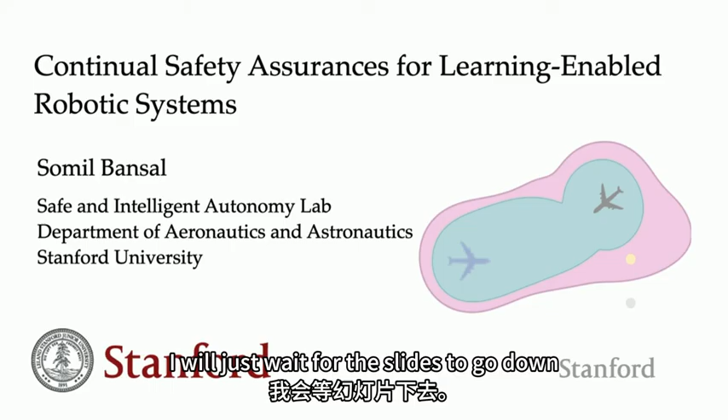Let me start this talk with the long-term goal of our lab, which is to develop robot algorithms that operate with guaranteed safety and performance in new and uncertain environments. We think about this question in the context of a variety of different applications: autonomous drones, autonomous cars, legged robots, aircrafts, and more recently, space exploration.

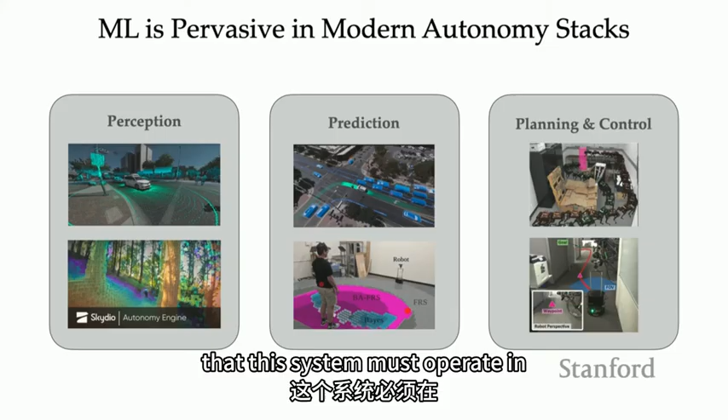If you look at these systems, machine learning and AI are becoming increasingly pervasive in their autonomy stacks, most notably for perception and trajectory forecasting, but also for planning and control. And for a number of good reasons: machine learning is really good at capturing the complexity of real-world situations that these systems must operate in, which could be otherwise very hard to capture using engineering domain knowledge.

But inclusion of machine learning has also come up with some new safety challenges for these systems. We're right in the Bay Area, where we hear news such as cruise cars being rolled back from San Francisco City, or robots crashing into humans on factory floors. The issue is severe enough that the US government, and since then many other governments, have passed executive orders to prioritize discussion on AI safety, both for autonomy and AI more broadly.

So there is this tension that we have a lot in autonomy today, which is: how can we enable these systems to leverage the capabilities and excitement offered by modern machine learning methods while also maintaining safety? In my talk today, I want to think a little bit about the source of this tension and what can we do about it.

I think one of the main reasons for this tension is that if we look at machine learning systems today, most of them are designed without any specific regard to safety. And when safety issues emerge in the design system, post hoc solutions are often engineered to counter these risks. I am going to refer to them as safety bandages throughout my talk.

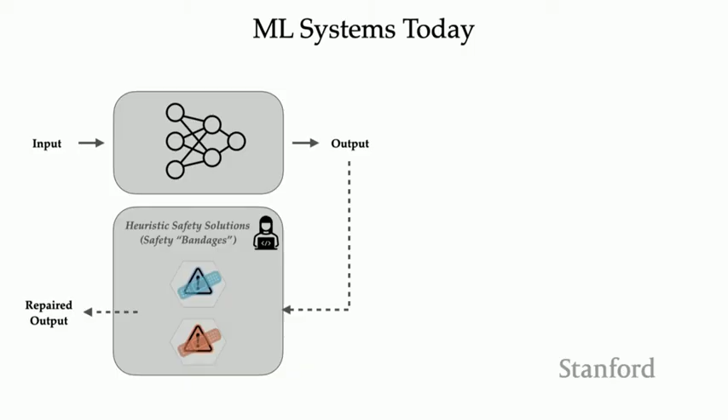As an example, earlier this year, in February I think, Waymo cars had a bunch of troubles with, for example, tow trucks. So the approach was to shut down the entire fleet of Waymo, update their software, and then restart the fleet. Now, while this approach makes the design of learning-based systems much simpler, it is flawed for a number of key reasons.

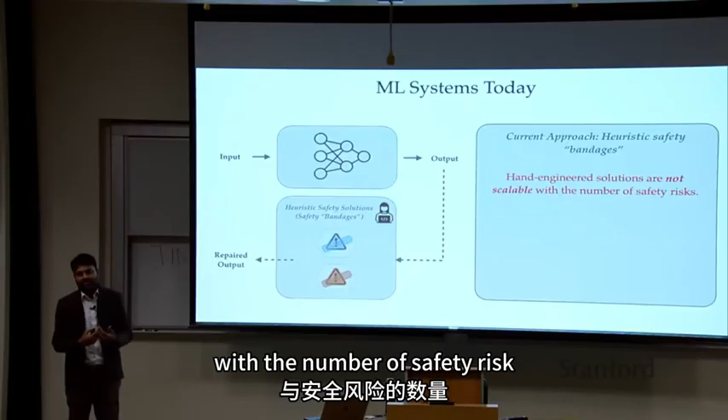First and foremost, these hand-engineered solutions are simply not scalable with the number of safety risks and situations the system must encounter. Moreover, these post hoc solutions often tend to be conservative in nature, which might degrade the performance advantages that we get out of machine learning methods. And finally, the heuristics designed for certain kinds of deployment conditions might not work as the systems encounter new and new deployment conditions in the real world.

So to overcome these challenges, in our research, we think of safety of learning-based systems as a continuous process where safety is formally ingrained in different stages of the learning process, starting from the design and training phase to their deployment, to iteratively improving the safety over the system's lifecycle.

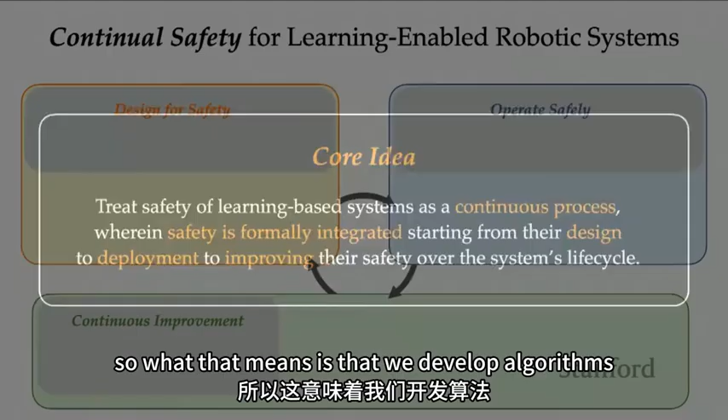So what that means is that we develop algorithms that programmatically incorporate safety requirements in the training process itself, in order to learn inherently safe and robust controllers and policies for robotic systems. Now, that I would call design time safety methods, or design for safety.

Now, that's definitely a step forward, but that's not all. Because as these systems operate in new conditions, they will need to adapt their behavior. So we are developing methods that detect out-of-distribution and anomalous situations for these systems and correspondingly adapt their behavior in order to maintain safety.

And finally, we want these systems to learn from their past failures, past mistakes. We don't want the system to make the same mistakes again and again. So to close this loop, we are developing methods that allow robotic systems to improve their safety from their past failures.

And so together, I think of this as a closed loop. I call it continual safety assurance framework, where assurances are provided provisionally during the design time. They are monitored and adapted during the operation time, and they're continuously improved over the system's life cycle.

So in the remaining time that I have, I want to dive a little bit deeper into some of my work. We will start with talking about how we can learn provably safe controllers from data, how we can adapt these controllers online under new deployment conditions, and finally, how we can stress test a given policy or controller to mine its safety critical failures.

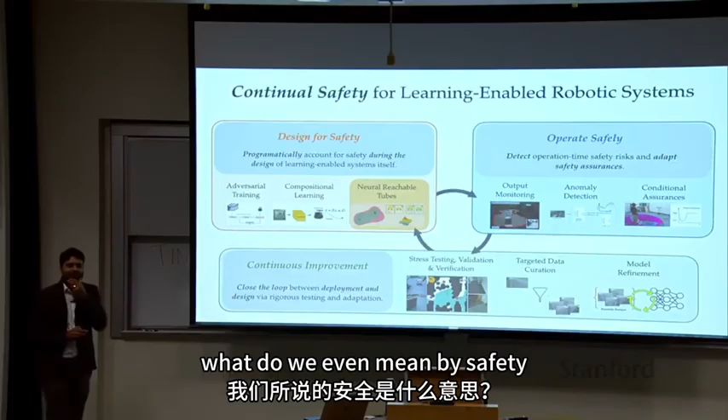So let's talk about learning safe controllers. But even before we talk about that, let's take a step back and ask ourselves, what do we even mean by safety? What do we want out of this safety analysis in an ideal world? I thought about it a lot, and I tried to summarize my thoughts in a single sentence, and this is my attempt at that.

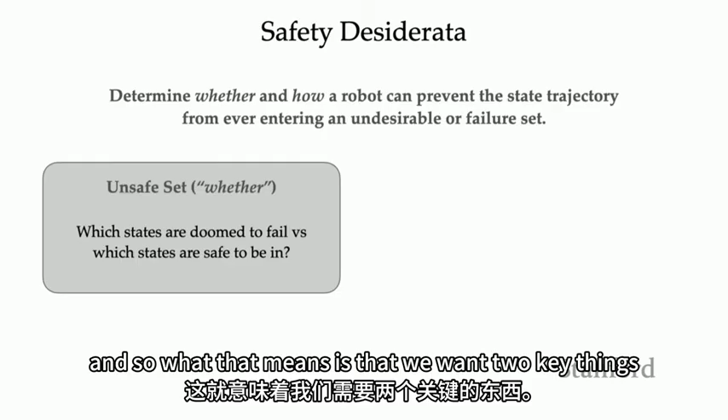I would say, out of safety analysis, we want to determine whether and how a robot can prevent its trajectory from entering into some undesirable set of states, which I will also refer to as the failure set. So what that means is that we want two key things. First, we want to quantify which configurations of the robot are doomed to fail versus which are safe to be in. And second, how can we keep the robot in these safe configurations? So first is the problem of whether the system is safe, and the second is how can I keep the system safe. I like to call it the whether and how of safety, and I will refer to that throughout my talk.

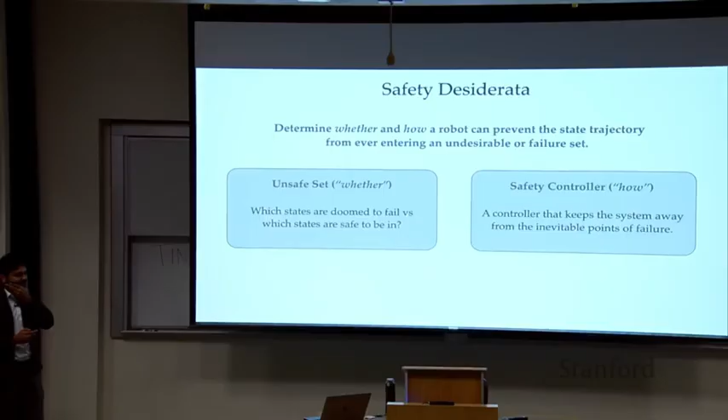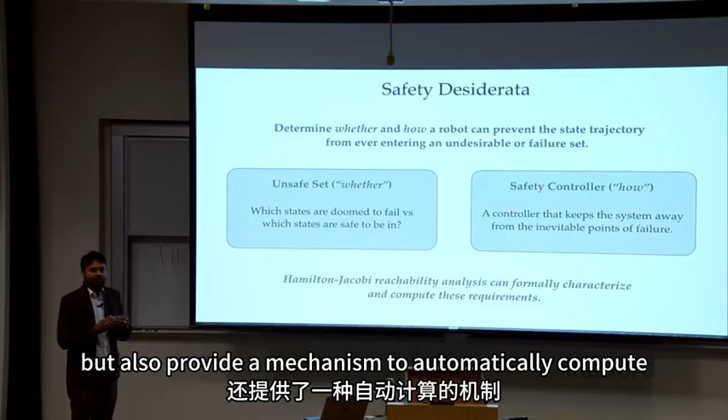Now, the good news is that control theory provides us a number of powerful frameworks for doing the safety analysis of autonomous systems. In our work, we use one such framework quite frequently, called Hamilton-Jacobi reachability analysis. The reason for that is that it not only helps us mathematically characterize these two requirements, but also provides a mechanism to automatically compute them. So let me spend the next few minutes talking about what Hamilton-Jacobi reachability analysis is, and then I'm going to come back to the question of learning safe controllers from data using reachability analysis.

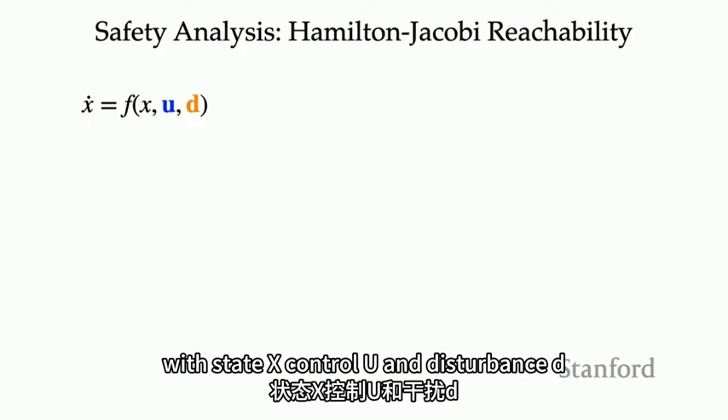Okay, so in reachability analysis, we assume that the underlying robotic system has some dynamics F with state X, control U, and disturbance D. Disturbance here represents uncertainty in the system, for example modeling error or unmodeled effects, or an actual adversarial agent that we may want to safeguard against.

Now, given these dynamics, the key thing we are interested in is the backward reachable tube of the system, which is a set of all initial states from which the robot will be ultimately driven to an undesirable set of states, or a failure set, despite the best control effort. So essentially, the backward reachable tube represents the unsafe configurations for the robot and should be avoided.

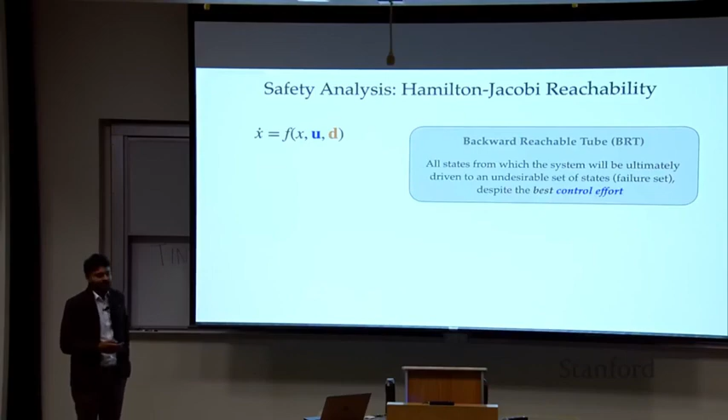Let's try to understand that with the help of a very simple example. Imagine a quadrotor moving longitudinally up and down in this room. Here the ceiling and the floor might represent the failure set that we don't want the quadrotor to crash into. The light red region over here is the backward reachable tube, meaning that if the quadrotor starts inside this set, then no matter what it does, it will eventually crash into the ceiling or the floor. So there is nothing you can do to avoid the collision. In other words, these states are as doomed as being in the ceiling or the floor.

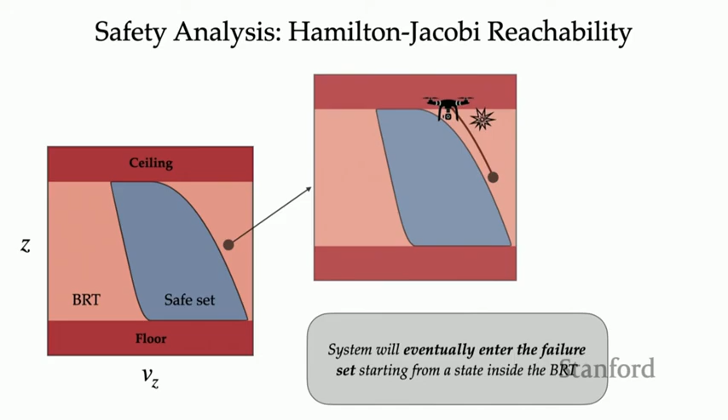The complement of this light red region is the blue region, or the safe set for the system, meaning that if the quadrotor starts inside this set, then it has a controller or a policy to keep it inside this set at all times. So reachability analysis will give us both this blue set as well as this safety controller.

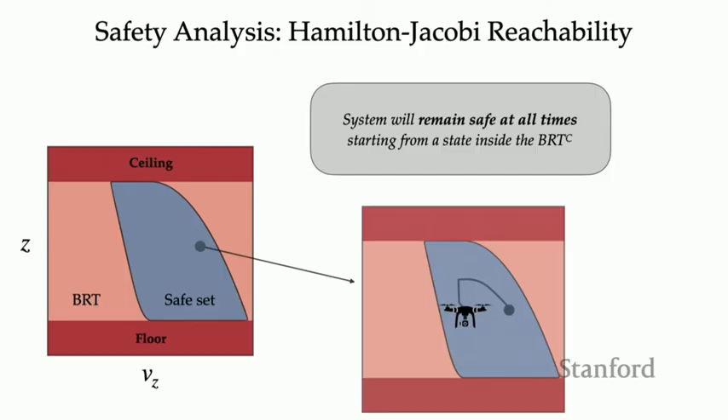So I'm going to dive a little bit into the math of reachability analysis and how it computes these two entities. The first step to do so is to define our failure set implicitly with a function L of x, which is negative inside the failure set and positive outside. So you can think of L of x as the safety reward the robot gets at state x.

If you're inside the failure set, you get a negative reward, and if you're outside the failure set, you get a positive reward. We can use any reward function that satisfies this property, but the one that's quite popular in robotics is the signed distance function to the failure set, which is naturally negative inside the set and positive outside.

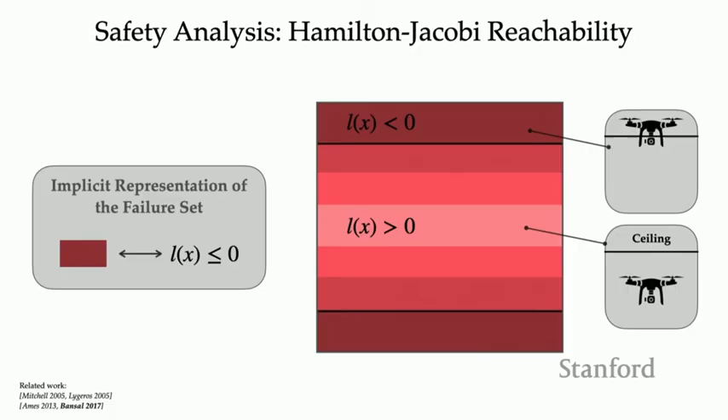Given this reward function, the cumulative reward of the trajectory is given by the minimum safety reward along the trajectory. This is slightly different from our normal optimal control and reinforcement learning problems, where it's the sum of rewards. Instead, it's the minimum of reward. This means that if the robot trajectory ever entered the failure set, this cumulative reward will be negative, otherwise it will be positive. So just looking at the sign of this reward, I can tell whether the system trajectory was ever unsafe or not.

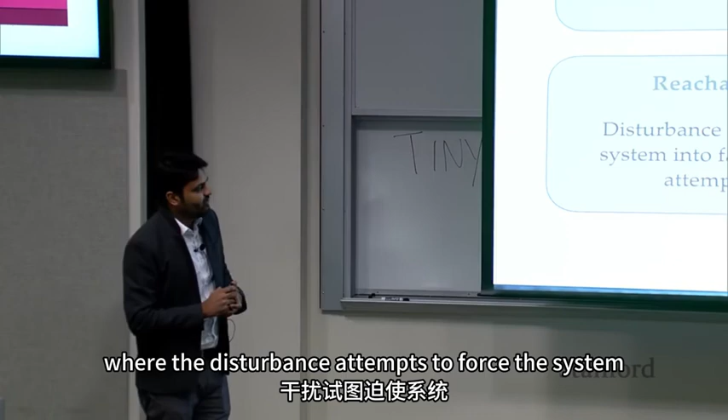And then, of course, we have control at our disposal. So what we want to do is formulate this game between the control and disturbance, where the disturbance attempts to force the system inside the failure set. In other words, it tries to minimize our safety reward, whereas the control tries to stay out of the failure set, maximizing the safety reward.

Similar to any other optimal control or reinforcement learning problem, we have a value corresponding to this game, which is simply the control maximizing it and the disturbance minimizing this overall cumulative reward. Intuitively, this value function is capturing the closest the system will ever get to the failure set. So if the value function is negative, that means the system must have entered the failure set at some point. And if the value function is positive, that means the system remained outside the failure set at all times. So the backward reachable tube that I described earlier, or the unsafe set, is nothing but the set of states where the value function is less than or equal to 0.

That's the idea of reachability analysis. Now, this value function can be computed using the principle of dynamic programming, which results in a Bellman iteration or Bellman backup. But in continuous state and time, this results in a partial differential equation. So this is just the Bellman equation written in continuous state and time, honestly. Just like the Bellman equation, it relates how taking a particular action affects the system value, or in other words, how the system's distance to the failure set changes. And once we solve this partial differential equation, which is called the Hamilton-Jacobi-Isaacs partial differential equation, we get the value function.

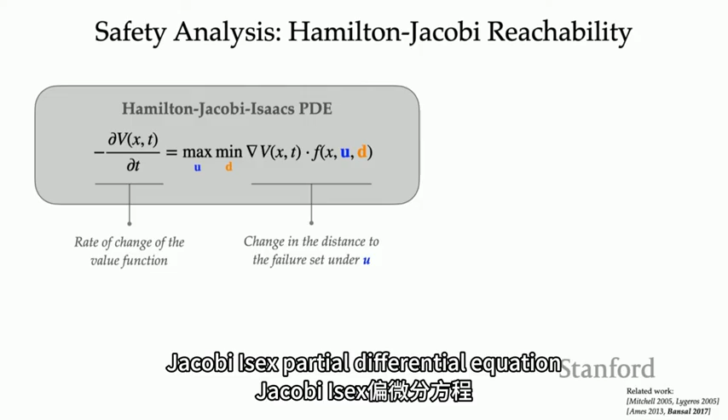Here I'm showing that value function for the quadrotor example I was showing earlier. The more red means the value function is more negative, and the more blue means the value function is more positive. So these states, which are closer to the ceiling and floor, not surprisingly, are particularly bad, whereas the states towards the middle of the room are very safe, as you would expect, because we are equidistant from the ceiling or the floor.

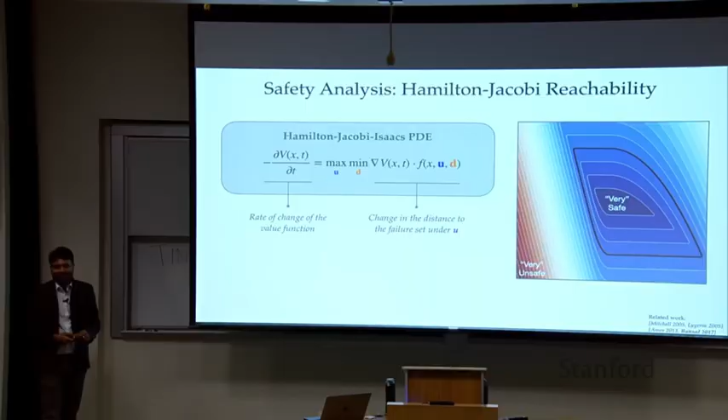Now, quick question: the value function is more negative towards the lower end than towards the positive end, even though the failure set is both ceiling and floor. Could you guess why? Gravity. Because gravity is pushing us more in one direction. So when we are closer to the floor, we are more unsafe than when we are closer to the ceiling, which is what this value function is capturing inside this color bar. But the beauty of reachability analysis is that this is an intuitive example, but that's not where it's meant to be — it automatically captures the effect of the dynamics of the system on the overall safety of the system.

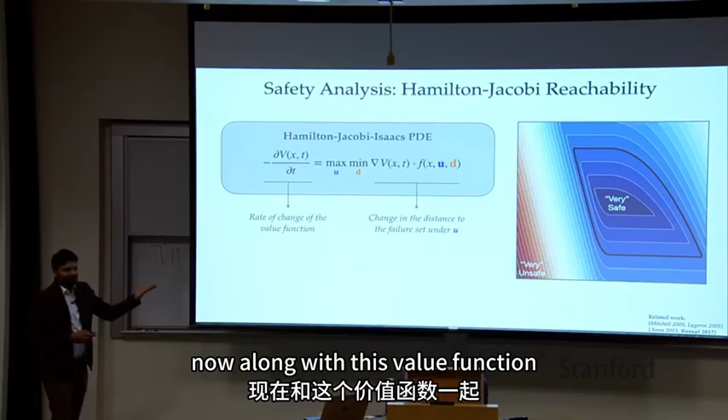Now, along with this value function, it also provides us a safety controller. Intuitively, what it's doing is that at any state x, it's pushing the system towards higher and higher values — remember, positive values means more safe. So it's essentially pushing us in the gradient ascent direction of the value function. That's what it's doing.

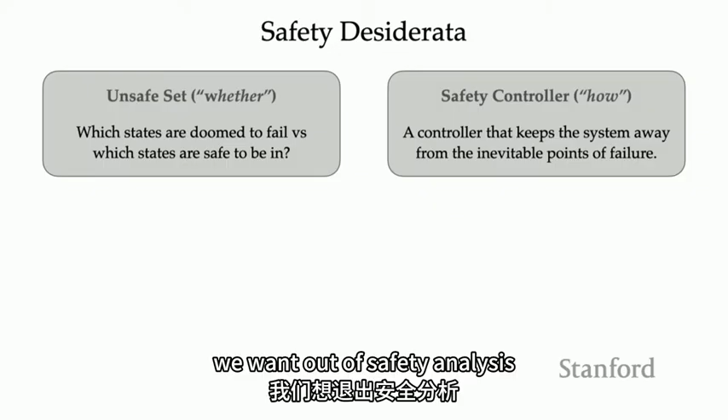Taking a step back, if you recall, I said there are two key things we want out of safety analysis: a set of safe states and a controller to keep me inside the safe states. I was talking about Hamilton-Jacobi reachability analysis, which captures these requirements with the help of the safety value function V, whose sign tells me whether I'm safe or unsafe, and whose gradient tells me a safe controller for the system. The nice thing about this theory is that it can be applied to general nonlinear autonomous systems.

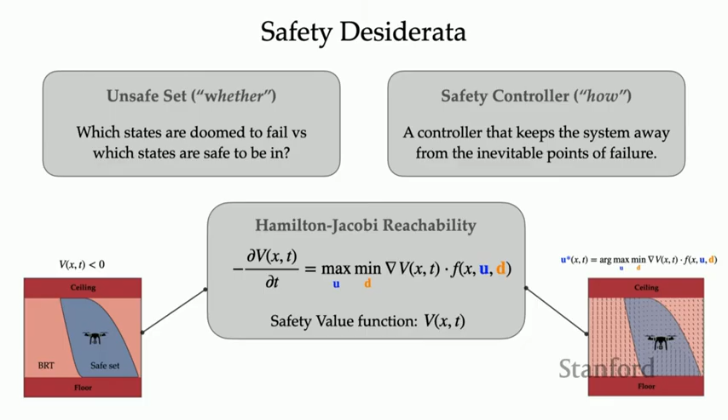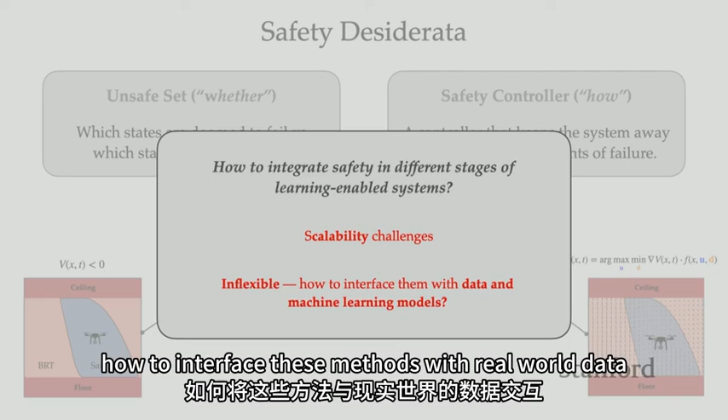But there are also a few challenges. The biggest one is scalability. Even though the theory is quite general, computationally it is very hard to scale these methods beyond even 5-dimensional systems, which really limits their use case in modern robotic systems. The second, equally bothersome challenge, is that it's not immediately clear how to interface these methods with real-world data and machine learning models.

So to begin making progress on these challenges, we will lean into neural approximations of the safety value function. Now, of course, we are talking about a safety critical system, so we have to be careful when using neural networks, and I share that concern as well—we will talk about it. But for now, I want to put guarantees on hold for a minute and talk about how we can structure the learning problem in order to learn good representations of safety value functions. And then I will come back and talk about assurances under these representations.

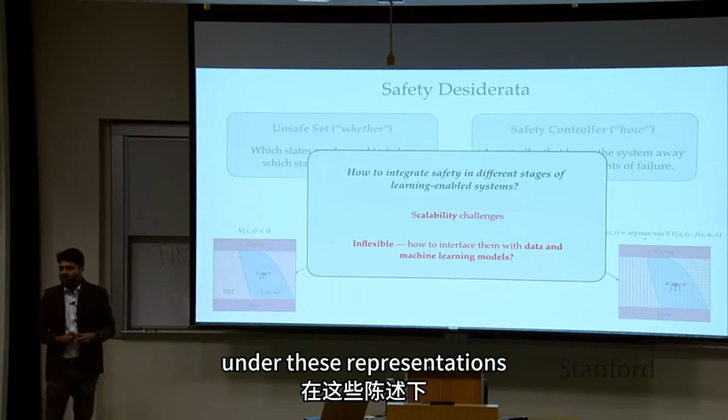More specifically, we will learn a neural approximation of the safety value function, which takes as input the state and time of the system and outputs the corresponding safety value function. Once trained, this value function can be used to synthesize the unsafe set as well as the safety controller using the same mechanism that I just described. But how do we obtain this value function?

So we call this method DeepReach. DeepReach is a self-supervised learning method, which relies on the fact that the true safety value function must satisfy the partial differential equation that I showed earlier. So the partial differential equation error can be used as a signal to train the safety value function.

In particular, in each training iteration, we randomly sample some state and time. We propagate it through the neural network to compute the value function, and correspondingly, we compute the PDE violation error. We can backprop from that to optimize the neural network parameters. So essentially, over time, the neural network is incentivized to learn a more and more accurate representation of the safety value function that is consistent with this partial differential equation. It's very much inspired by physics-informed machine learning these days.

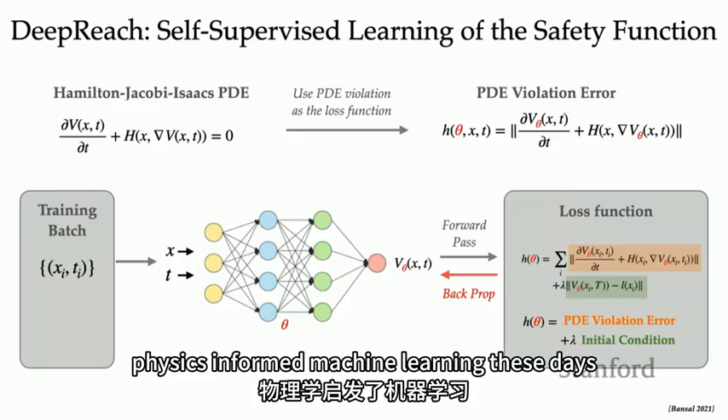There are two key advantages of doing this. Number one, we can explicitly bake in safety requirements in the training process itself and learn inherently safe controllers from data. Second, the neural representations are much more easily scalable to higher dimensional systems, so we can synthesize safe controllers for a broader class of autonomous systems. Let me show a few examples of that.

The first example here is the 3-aircraft conflict resolution problem. There are 2 evader vehicles and a pursuer vehicle, which in this case is an uncertain or adversarial aircraft whose behavior we don't know, so we treat that as a disturbance in the system that we want to safeguard against. Now, the failure set here is given by any configuration of these 3 aircraft where any 2 aircraft are in close proximity of each other—in other words, loss of separation.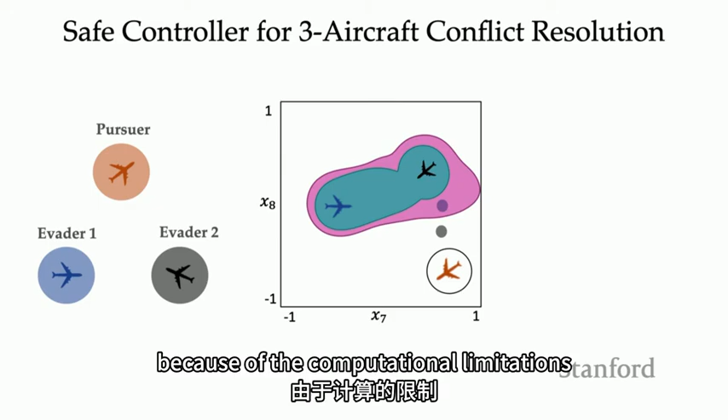Let me show you one such configuration and see what's going on here. So let's pick this configuration. Starting from this configuration, I'm plotting the trajectories of the 3 aircraft. Here you see that the orange vehicle is going after the blue vehicle, and the blue vehicle is able to avoid the orange vehicle, but in the process of doing so, it cannot avoid a collision with the black aircraft above. So there are these 3-way interactions happening between the aircraft, which we could not capture earlier because of computational limitations. But now we can not only capture them, but safeguard against them using DeepReach-based safety controllers.

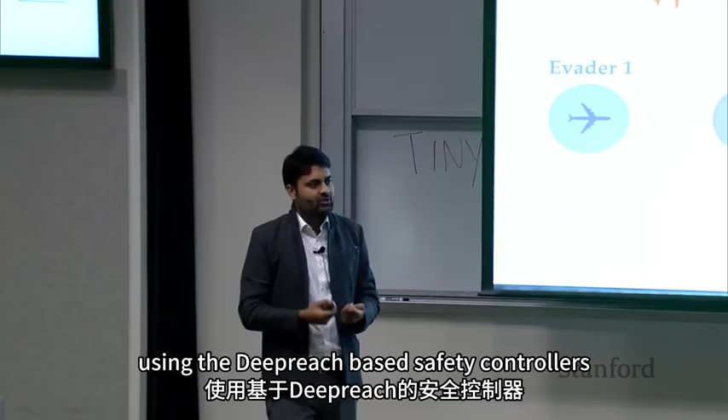We have also applied this framework in the context of autonomous driving. This was inspired by my work at Waymo, which at the time was dealing with urban driving in San Francisco. One of the big problems was stranded vehicles, like an Uber or trash truck blocking your lane. In this case, the autonomous car needs to go to the other lane, cross over, and come back to its own lane without colliding with oncoming traffic.

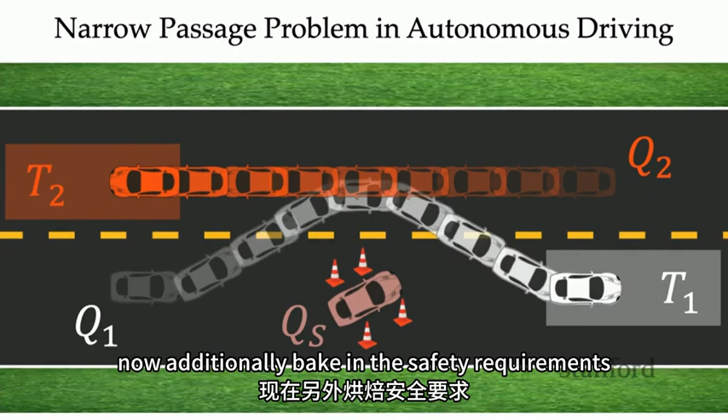We started with a learning-based controller, and it performs really well, except that it was not always able to capture this nuanced intersection point between the two cars, leading to collision like over here. But with deep reach, we can now additionally bake in the safety requirements directly in the learning process.

Let me show the behavior of that controller in the car icons over here. What it does is it pushes the white car a little bit towards the stranded vehicle and makes the orange vehicle swerve so that a clearance is formed between the two vehicles. Once they cross each other, they go back to their respective lanes.

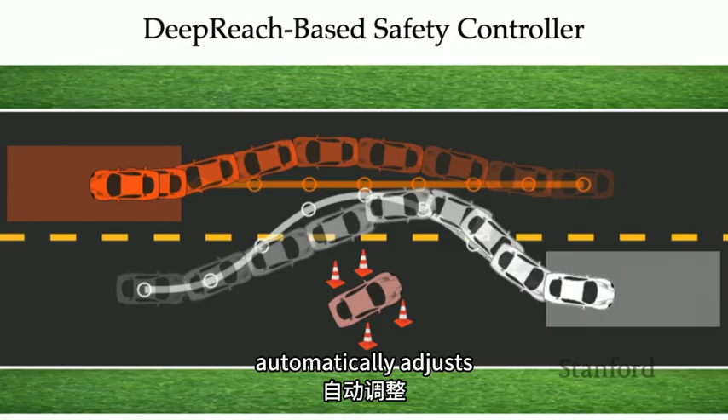What is particularly interesting is that the behavior of the safety controller automatically adjusts to the oncoming traffic. For example, if the orange driver is very aggressive, the safety controller makes the white vehicle wait behind the stranded vehicle, let the orange vehicle pass, and then go over and cross the lane. If you think about it, this is how intuitively we will drive in these situations, except now these behaviors emerge automatically out of the learning-based system because the safety requirements were baked into that.

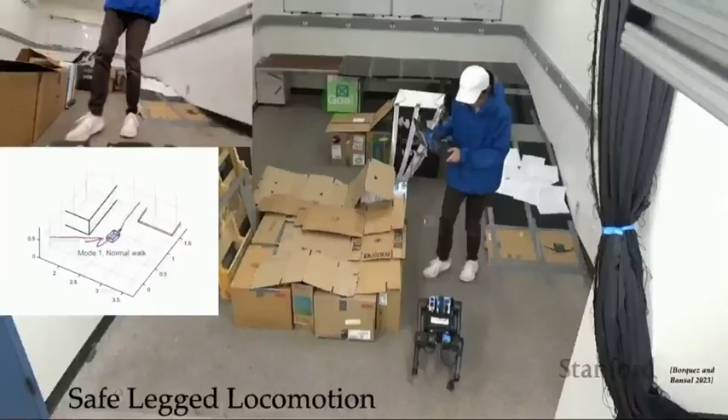In our latest work, we applied deep reach for learning safe controllers for legged locomotion. Here, the safety problem is a bit more challenging because it's a hybrid system. It has both continuous controls, but also discrete controls coming from different walking patterns. The safety controller reasons about different walking patterns in order to reach its goal without colliding with obstacles.

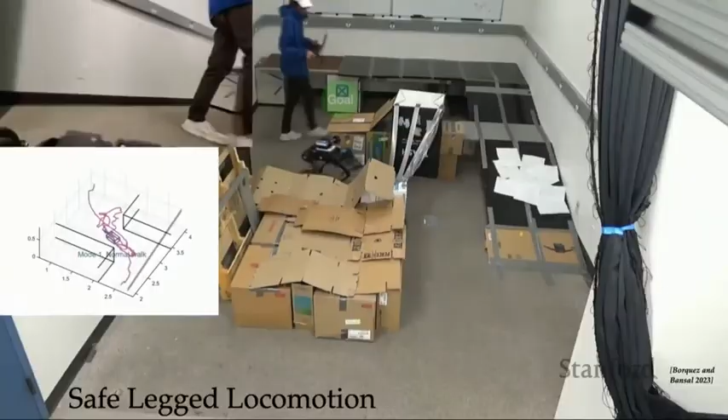What I find exciting is that my student Shuang here is deliberately trying to push the robot into a collision, but the safety controller counteracts this external disturbance, sometimes even changing its walking pattern completely in order to maintain safety.

To counter this problem, we have been looking into probabilistic safety assurances for deep reach. I'll talk about what that means in a second. The key idea behind this probabilistic assurance is that the learned safety value function induces a candidate safe policy for the robot as well, which if I apply on the system should ideally achieve the same value as what deep reach was trying to learn, because that's what it means to have the value of a policy: if you roll out that policy, you should achieve the same value back.

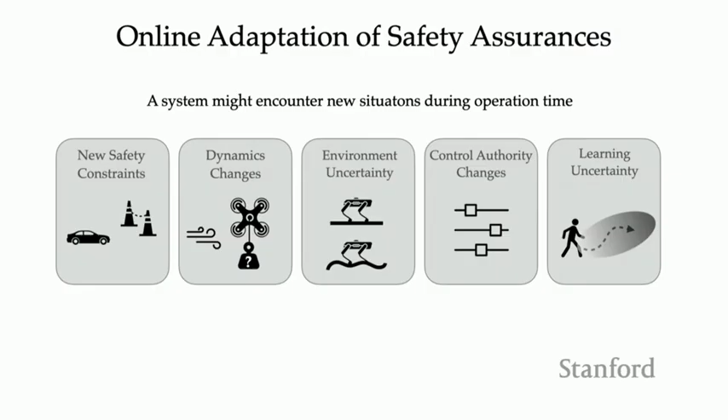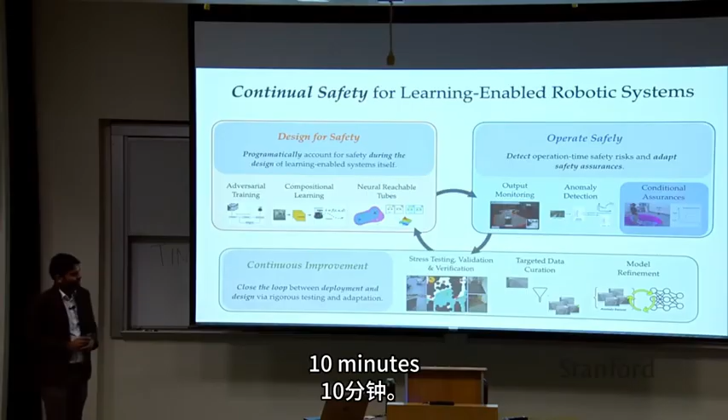But so far, my definition of what is safe or unsafe isn't changing, and everything about the system is known a priori, whether it's dynamics, control bounds, and so on. That's not true in the real world. In the real world, you constantly encounter changes in your safety constraints, your dynamics, your control authority, or your environment. As the system learns more about its world, it needs to dynamically adapt these safety controllers to maintain system safety. So that's what I'll talk about for the next 5-10 minutes: how can we adapt these safety controllers online very quickly?

One exciting aspect of neural safety representations is that you can easily input additional data to the neural network, for example uncertain system or environment parameters, and learn the safety value function as a function of these parameters. We call these parameter-conditioned safety value functions, since they're also now conditioned on beta. The advantage is that offline, if you learn this parameter-conditioned value function, online you can quickly activate the safety value function corresponding to the deployment conditions you encounter in order to maintain safety.

Let me show you that on a simple drone delivery problem. Here the drone needs to go to its goal location while avoiding collisions with obstacles on its way, but it needs to do so in uncertain wind conditions. We don't know what wind intensity it will encounter when it goes out for delivery, so we learn a parameter-conditioned value function as a function of the uncertain wind intensity.

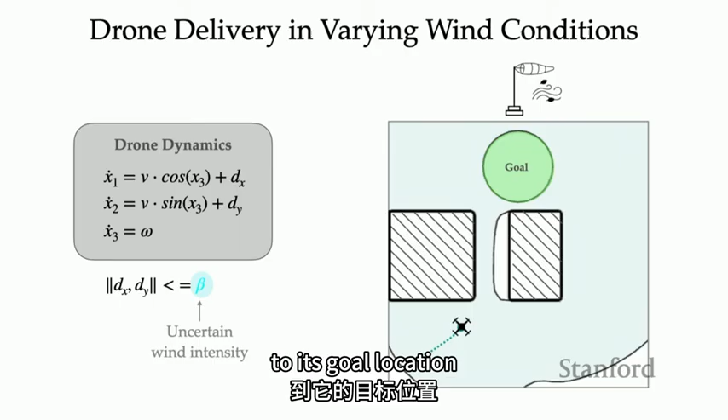Here I'm showing the safe set corresponding to low wind intensity. This means that if the quadrotor starts inside this blue set, it can reach its goal safely without colliding with obstacles. When the drone started, wind intensity was low, so it took a more direct route to its goal location, through this narrow gap, which makes sense since it's more efficient.

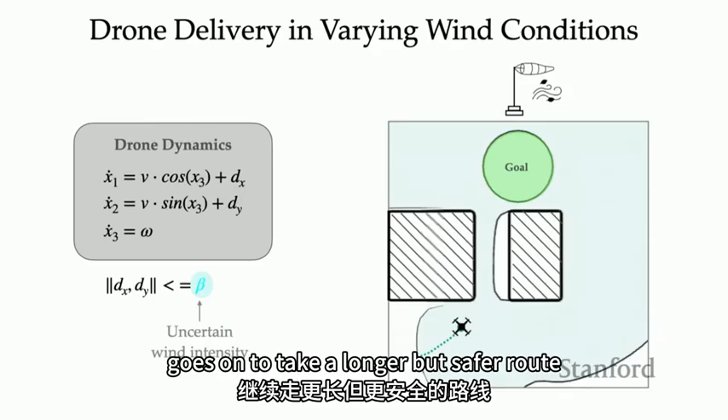But on its route, the wind conditions change, and now the wind intensity is high, so the safe set changes. Now this middle route is no longer safe for the system under this high wind intensity. But using this parameter-conditioned representation, we can quickly adapt our safety controller, which in this case takes a longer but safer route to its goal location.

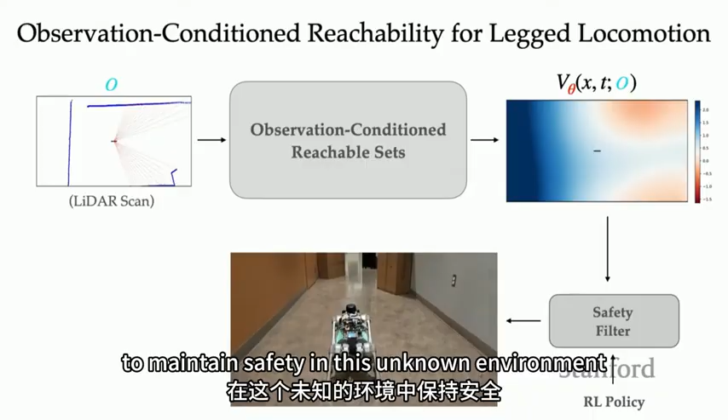In fact, we don't have to stop at just parametric changes. We can now think about adapting the safety value function directly from high dimensional observations, such as RGB images or LiDAR scans. For instance, here this robot dog is dynamically constructing its safety value function directly from raw LiDAR scans, and using it as a safety layer on top of an RL-based policy to maintain safety in this unknown environment.

So not very innovatively, we call it observation condition reachable set instead of parameter condition reachable set. And there are two key adaptation components here.

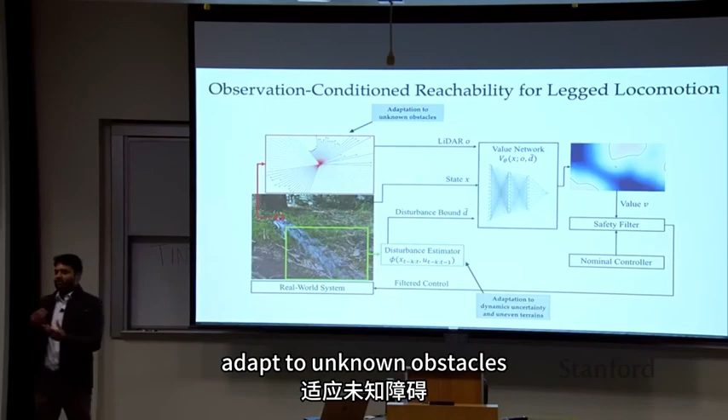The first one is that the robot uses this LiDAR scan to dynamically adapt its safety value function, which allows it to adapt to unknown obstacles that it's going to encounter in the real world.

There's a second adaptation component, which is allowing it to constantly estimate the uncertainty in its own dynamics, for example due to rugged terrains or slippery surfaces that you might encounter, and correspondingly adapt the safety value function using the idea of parameter condition reachable set. So it's combining both of them together to ultimately get the safety value function, which is then used as a safety filter for a nominal policy.

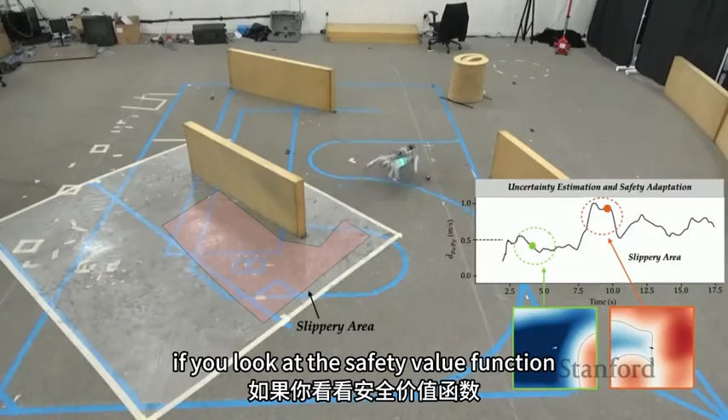Let me highlight the uncertainty estimation component a little bit more. In this video, the robot encountered a slippery patch. As the robot enters the slippery patch, the uncertainty estimation in its dynamics is high. Correspondingly, if you look at the safety value function, it becomes more conservative - more red meaning more conservative - and it slows down the robot in order to avoid a collision with the obstacle in front.

So of course, there is also adaptation going on based on LiDAR, but I'm only highlighting the uncertainty component part here. So this is the kind of adaptation we can enable in real time on robotic systems.

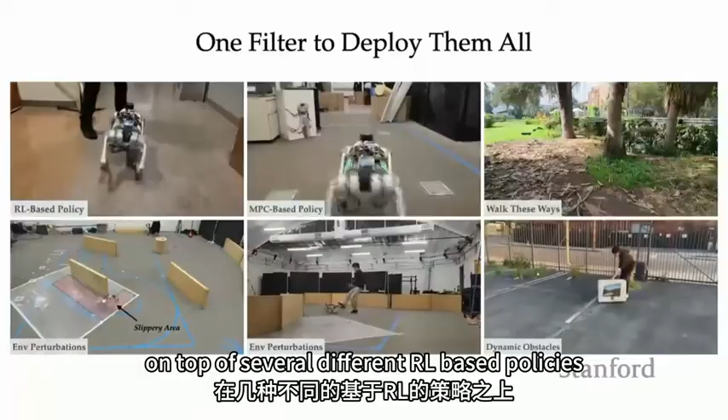In fact, this framework is completely agnostic to what underlying nominal policy you are using. So here I'm using it as a safety layer on top of several different RL-based policies, such as RMA, Walk These Ways, as well as MPC-based policy in a variety of different environment terrains, dynamic obstacles, and adversarial humans.

Again, the key component here is to be able to adapt to dynamic obstacles or unknown obstacles and the environment uncertainty, which is what the neural safety representations can enable us to do.

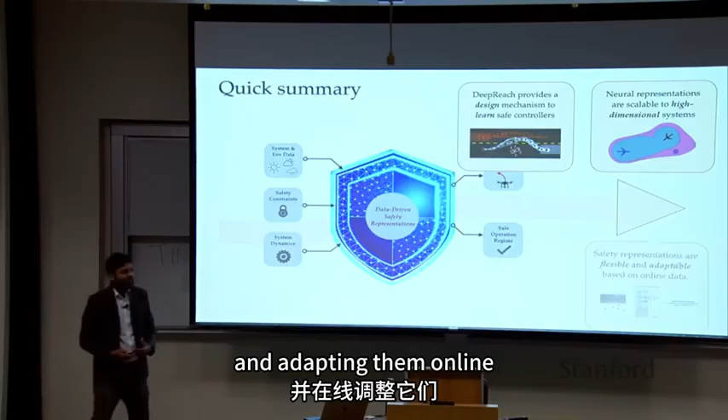Okay, so far I've talked about designing neural safety representations and adapting them online corresponding to the changes in the system and its environment.

Now, for the remaining time, I want to focus on the reverse direction, which is: suppose you give me a learning-based policy. So far I was designing learning-based policy, but now suppose you give me, it could be for example an RL-based policy, how can we stress test this learning-based policy to figure out the data regimes where it might cause safety-critical failures of the system?

And we have been particularly interested in stress testing vision-based controllers for two reasons: because they are becoming increasingly ubiquitous in our autonomy stacks, but also they have traditionally been very challenging to handle using traditional safety analysis methods because of their high dimensionality and the complicated nature of visual inputs.

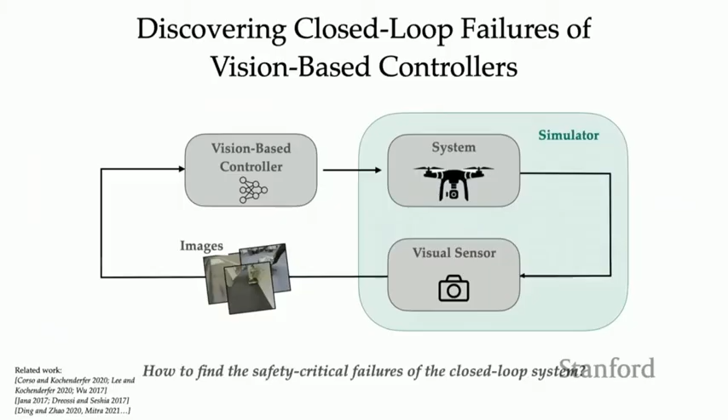So let me formalize the problem a little bit. Once again, we have a robotic system with some dynamics, and at each state we have a visual sensor which is giving me visual observations such as an RGB image or a point cloud, which is taken as input by a vision-based controller that gives me the control to be applied on the robot.

I'm also given a simulator which I can use for stress testing this system. My ultimate goal is to figure out the set of images or point clouds I, which lead to the failure of this overall closed loop system. So I'm very specifically interested in finding I's that lead to the failure of the system, not just the vision-based controller.

And what we do is we cast this failure discovery problem as a reachability problem and use the corresponding backward reachable tube to extract these visual failures. So let me explain how we can do that.

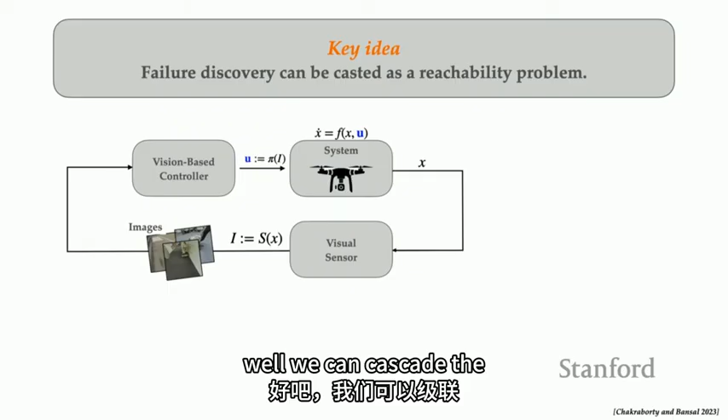Well, we can cascade the robot sensor function along with its vision-based controller to obtain an equivalent state-based policy for the robot. Because X goes to I goes to control, so if I combine the two, it goes from X to U. So I can simplify, for the purpose of stress testing, my closed loop as the system in closed loop with this augmented policy.

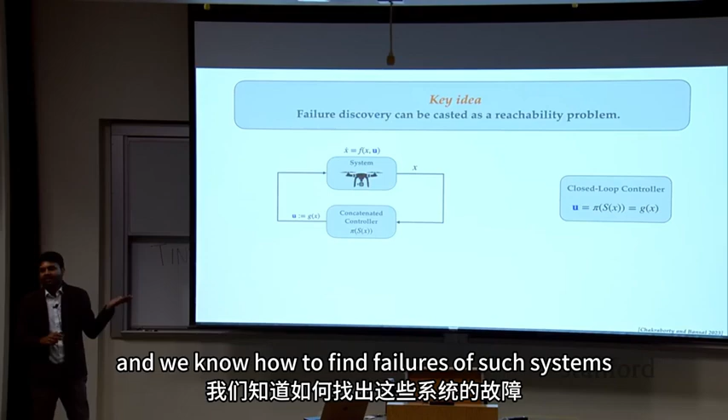And we know how to find failures of such systems - that's what I've been focusing on in the first half of my talk. We can compute the backward reachable tube, which generally gives me the set of all states which will lead to the failure despite the best control action.

But in this case, I'm not interested in the best control action. I'm interested in a specific controller that's given to me. So I can simply replace this max U by that specific controller. With this minor change, I can use the same reachability tools that I've been describing so far to compute this backward reachable tube. So you can think of this as policy-conditioned reachability, if you will.

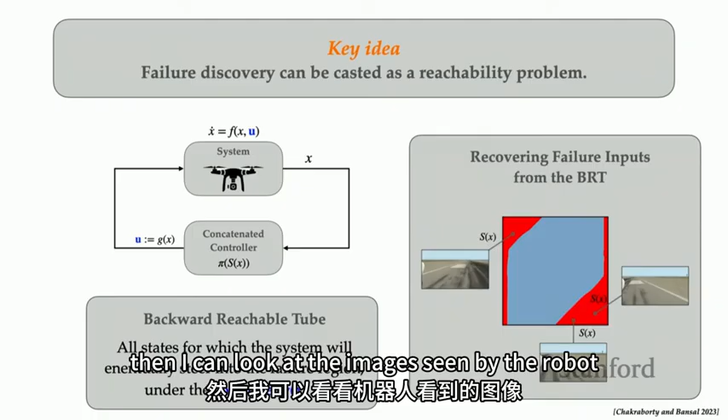So once I get the backward reachable tube, then I can look at the images seen by the robot along these failure states, which will give me the visual failures for the system.

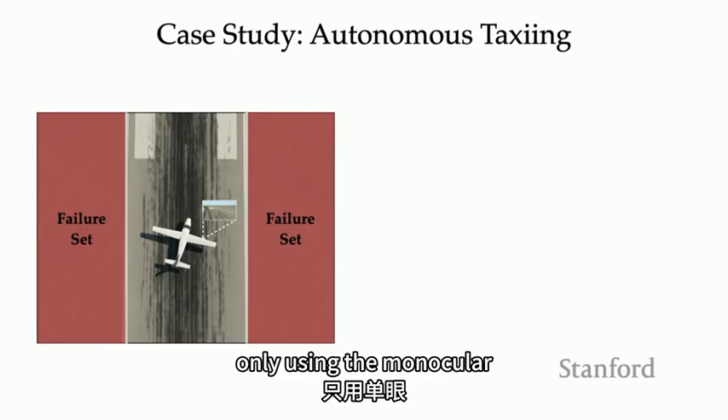Let me explain that in the context of an example. This work was done in collaboration with Boeing, which designed a vision-based controller for autonomous aircraft taxiing. The goal here is to keep this aircraft on the runway only using the monocular RGB images from the camera on the right wing of the aircraft.

Because they were testing what happens to the taxiing process if there is no GPS, they were trying to test these vision-based policies. But in the process of doing so, we don't want the aircraft to leave the runway. So that's my failure set in this case, outside the runway boundary.

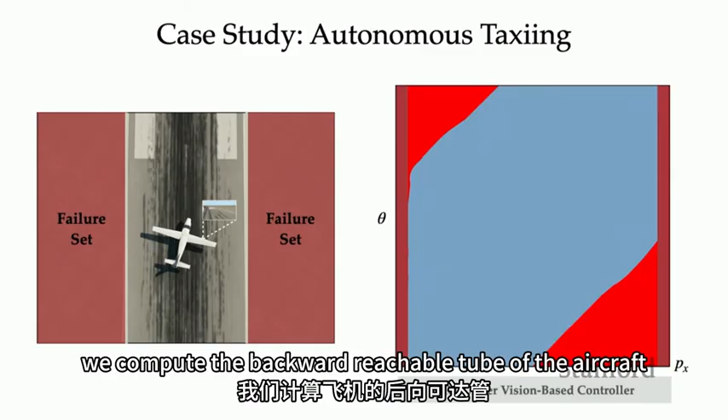Now, using this proposed framework, we compute the backward reachable tube of the aircraft under the vision-based controller. In red are the starting configurations of the aircraft from which it will ultimately be driven off the runway under the vision-based controller, whereas blue means the safe configurations of the aircraft.

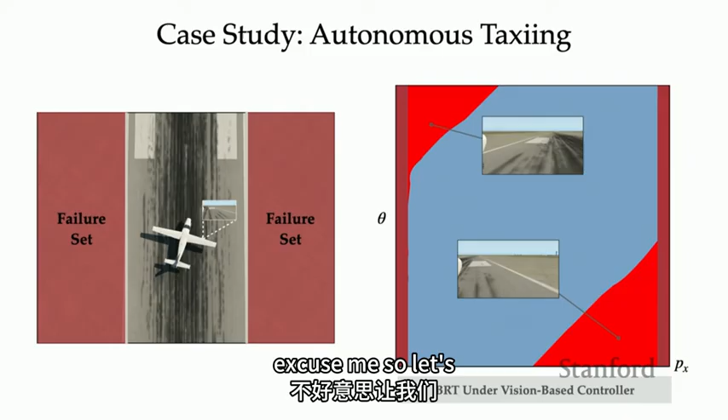And here are some of the representative images that cause the failure. Let's take a look at this image and see what's going on, why it's causing the failure. This is the first-person view, which is what the aircraft sees to make the decision.

Upon analysis of this image, we found that the vision-based controller confuses this runway marking with the center line of the runway, and it drives the aircraft towards that marking. By the time it realizes it's not the center line, it's already too late, and it caused the aircraft to leave the runway.

So using the proposed framework, we can find such semantic failures of the vision-based controller. And I want to highlight that these are not just any semantic failures - these are precisely the failures of the vision component that lead to system-level failure.

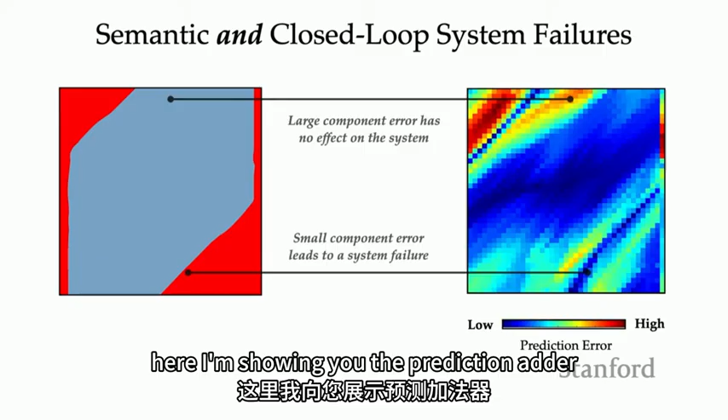So for instance, here I'm showing you the prediction error of the vision-based controller. Red means high prediction error, and blue means low prediction error. You can see there's a whole bunch of states where the prediction error is high, but that doesn't mean anything for safety - the system is still going to remain safe.

So there's a component-level failure, but not a system-level failure. Conversely, there are a whole bunch of states where the prediction error is really low, but that is enough to trigger a system-level failure. So we are particularly targeting those component-level errors that then lead to system-level failures.

But because of this semantic failure, actually this state is no longer a failure at night, and we improve the safety of the aircraft. Similarly, we can find the failures as a function of cloud conditions, and we can get a diverse set of failures of this system.

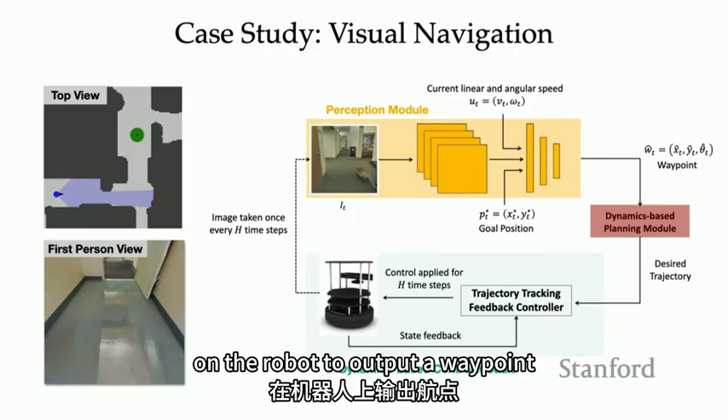Let me show another example. This is an autonomous indoor navigation pipeline, which has a perception component that takes as input the RGB image on the robot to output a waypoint, which is then tracked using an MPC-based controller.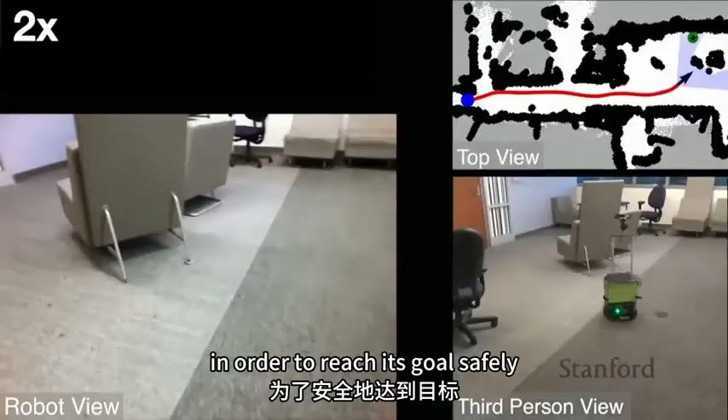This is my bike, by the way. I used to sit here 5 years ago when I was at Berkeley.

But there are a lot of interesting failure modes of this controller that we found using the proposed framework. In the interest of time, let me highlight one. We learned that the vision-based controller learns a correlation between light-colored surfaces and traversability, because much of the training data has light-colored floors. So the controller learned this spurious correlation that whenever there's a light-colored surface, it can go through it. During test time, when it encounters light-colored walls, it thinks it can go through them too, resulting in a collision. So we're trying to figure out these failures of the vision-based controller that ultimately lead to system-level failure.

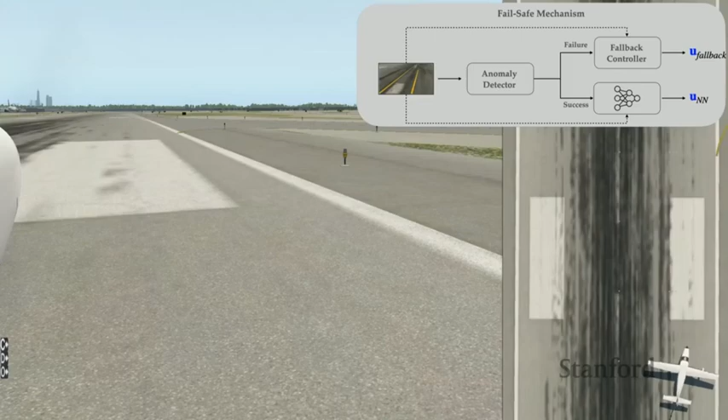But why am I doing this? Where am I going with this? Well, if I know the failures of a vision-based controller, I can use it to improve the controller. That's the ultimate purpose. For example, I can use these failures to train an anomaly detector, which given an image, tells me the probability of failure of the system. And if this anomaly detector triggers a fail, I can use a fallback controller to preserve safety in an online mode. This is the same scenario as before, where the aircraft was failing because of the runway marking. But now the anomaly detector flags that as a failure input, so it slows down the robot, which is what the fallback controller does. Once we cross the pedestrian crossing and the runway marking, we go back to the learning-based controller, maintaining system safety that way.

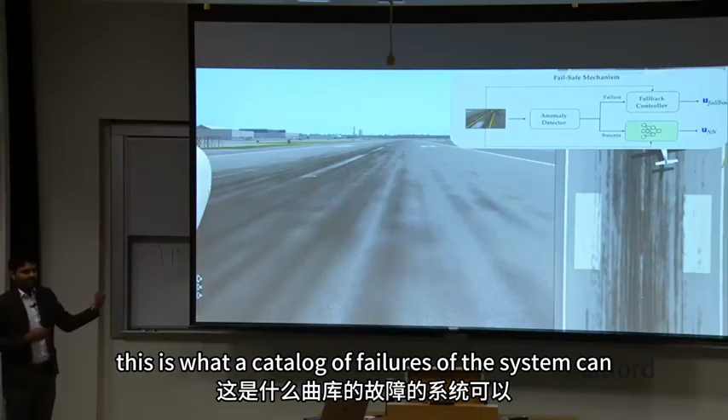This is very preliminary work. Of course, there are a lot of interesting questions here, like how do you design the anomaly detector? How do you design the fallback controller based on that anomaly detector? These are very interesting questions, but a catalog of failures of the system can at least give us a starting point.

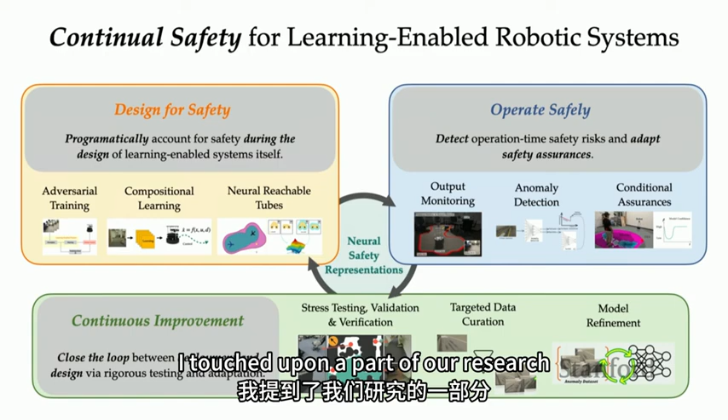Okay, let me take a step back. The key goal of our research was to design autonomous systems that can leverage the capabilities offered by modern machine learning methods while also maintaining safety. Towards that goal, we think about safety in different stages of the learning process, from design to approach to operation to offline testing. Today, in particular, I touched upon a part of our research, neural safety representations that can enable and operationalize such a framework.

I have a few more minutes, so let me quickly highlight some of the other projects in the lab without going into too much detail. I talked about DeepReach, one paradigm to learn controllers for robotic systems, but there are many other interesting learning paradigms that have shown very promising results.

For example, imitation learning. We've been asking ourselves, how can we learn safety-aware imitation learning policies, in particular behavior cloning policies? From a safety viewpoint, one problem with imitation learning is that it suffers from the compounding error problem, or covariate shift problem, meaning even if you give safe demonstrations to the system, there's no guarantee the resultant policy will be safe.

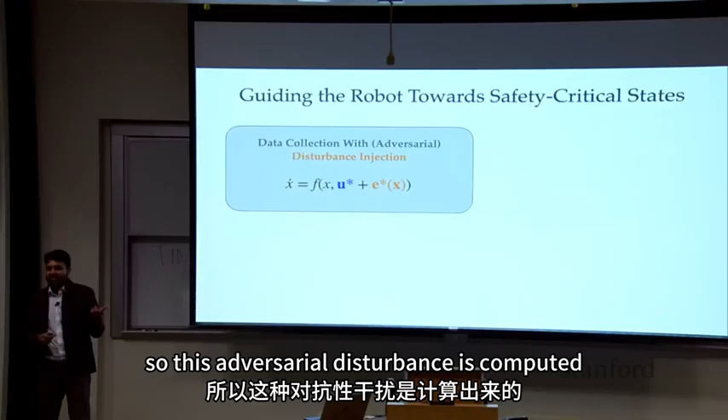So to address this problem, we have been injecting an adversarial disturbance into the system during the data collection procedure. This adversarial disturbance is also computed using reachability analysis, but it does exactly the opposite of what the safety controller does. Rather than pushing us away from safety-critical states, it pushes us towards safety-critical states, doing gradient descent instead of gradient ascent on the value function. By doing so, our hypothesis is that the robot gets to visit more safety-critical states, and we can learn corrective actions from those states.

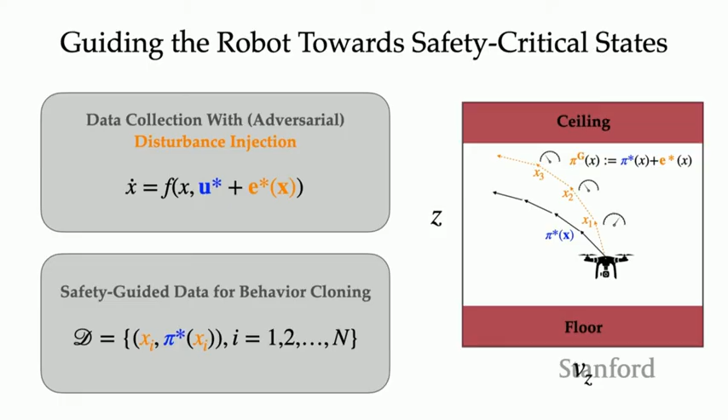Now, during training time, once we collect that data, we train the behavior cloning policy using the same methods as for the rest of our behavior cloning policies. But during test time, if the policy makes an error, and in particular a safety-critical error, hopefully it will be able to better recover from such states.

So that's the hypothesis, let's see how it plays out. This is the same aircraft taxiing problem I showed earlier. Here's the imitation policy, which goes from image to action.

Over here, I'm showing you the percentage failures across a bunch of test trajectories for vanilla behavior cloning and safety-aware behavior cloning for different numbers of demonstrations. You can see that even with a handful of demonstrations, injecting this safety information significantly improves the safety of the policy at test time.

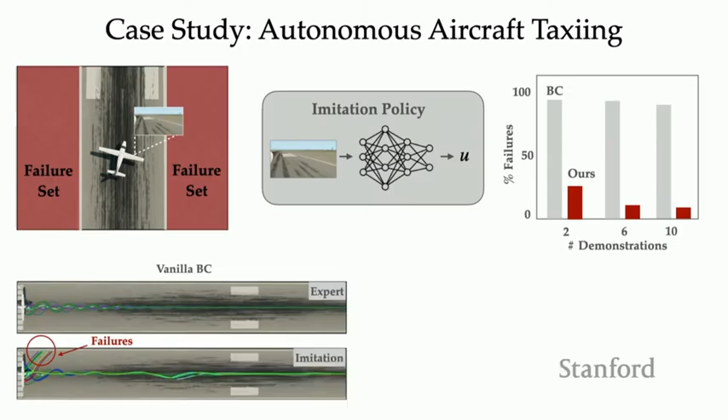To understand why, here I'm showing you the demonstration as well as the rollout of the policy for the vanilla method and then our method.

You can see that for vanilla behavior cloning, as soon as the policy makes errors, in particular as soon as it starts going toward the boundary of the runway, it cannot recover from it because it hasn't seen much data on those states. On the other hand, with the safety-guided imitation policy, we are particularly pushing the system toward this runway boundary, so it can learn recovery behavior from such states, which then reflects in its test time performance.

And to clarify here, the data used for both methods is exactly the same.

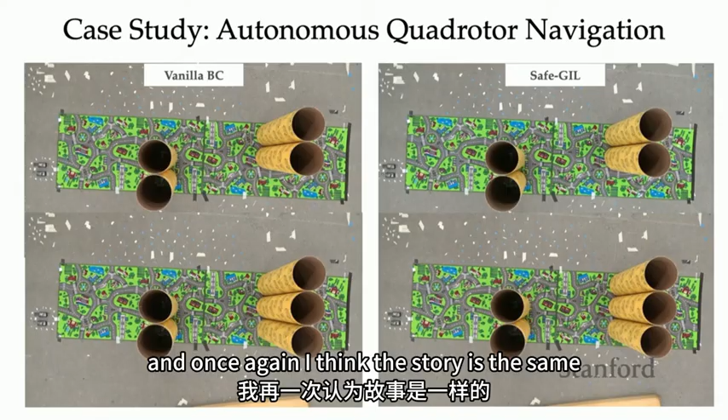We have also applied this on a real Crazyflie, and once again I think the story is the same. With only 5 demonstrations, we are able to do much better sim-to-real transfer, specifically when we think from a context of safety.

And in fact, I believe there is something more here. This idea of using safety-critical information can be useful to guide the exploration of our learning agent more generally, in my opinion, in order to design more robust policies.

For instance, here we are using the safety information to guide the exploration of a sampling-based planner, in this case MPPI. You can see how this signal helps the planner explore more relevant parts of the state space. Earlier, I was wasting a lot of samples in the obstacles, but those are useless samples that are never going to improve performance. So if you can guide them in the right direction, you can achieve the same performance with much fewer samples. Safety can also help with exploration during the design phase, a direction we are actively pursuing in our group.

And then another big challenge in safety today is: who gives you these safety constraints? Who tells you what is safe, what is unsafe? That's a big question. Luckily, for many aviation applications, the FAA gives us that, but in robotic systems that is not clear.

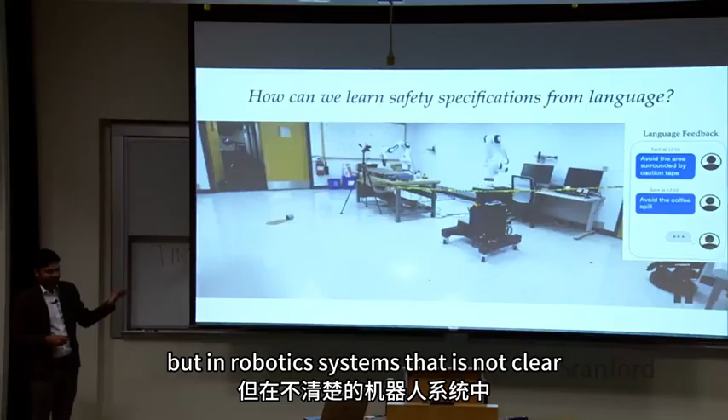So we have been thinking about how we can use language as a medium for someone to flexibly define these constraints for us. For example, in this picture, as my robot is going through the lab, can I communicate to the robot to avoid the coffee spill on the floor?

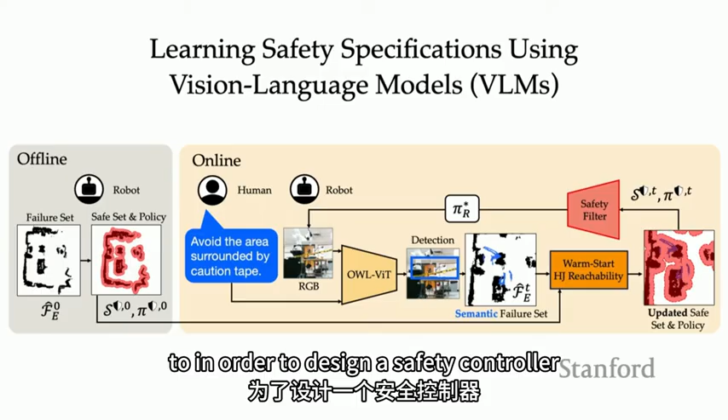So we have been using a vision language model to convert this natural language feedback into physical constraints that are more interpretable by traditional safety analysis methods, such as reachability analysis or control barrier functions, in order to design a safety controller that adheres to this natural language feedback.

Here is a very simple experiment of that. Here you will see the safety constraints given by the user, and we're using a VLM to convert that into a safety constraint, and then correspondingly computing a safety controller.

So now the robot is given this constraint: avoid the coffee spill. Sorry, it actually doesn't slow down—it doesn't actually stop. Somehow the video was laggy here.

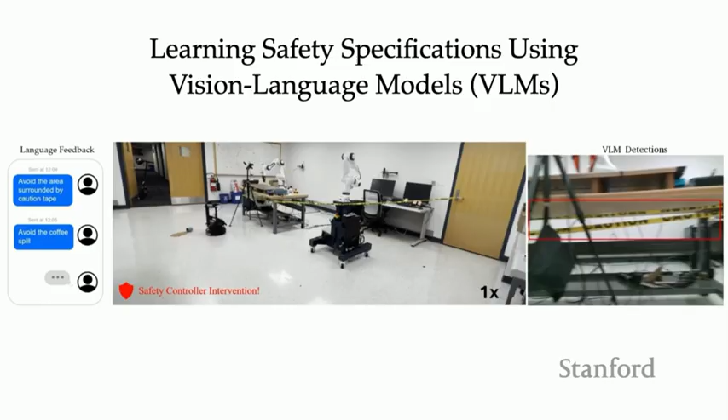This is nothing fancy compared to what we can do with VLMs and LLMs today, but it's a starting point to think about how these tools can be used to define rich semantic safety constraints for our robotic systems.

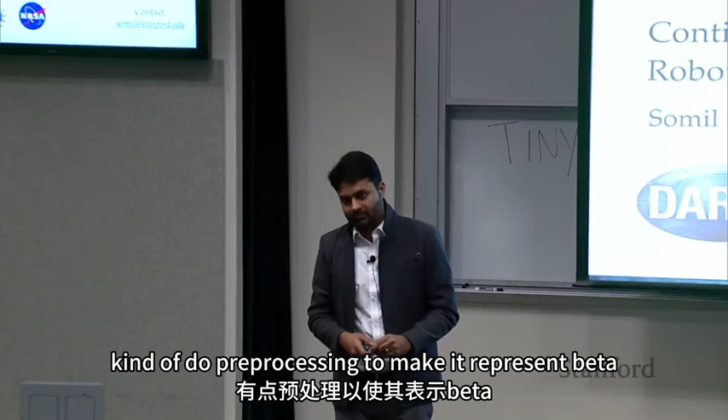Yeah, so in that LiDAR example, you can think of beta as not explicit parameters but latent parameters. The LiDAR scan goes into, in this case, a graph neural network, which gives some latent representation as output, which is then taken as input by the safety value function. So beta could be explicit physical parameters, but they could also be latent parameters. So for sophisticated or complex input for beta, you can do pre-processing to make a representation? Yes, you can do encoder-decoder kind of frameworks, or you can do simultaneous learning as well.

So how does the complexity of DeepReach scale with the dimension? HJ reachability in general scales very poorly, but how does DeepReach scale? That's a good question, and I think what it scales with, the computational complexity, is not immediately clear. I can give you a two-dimensional example where the value function is really complex and will be very hard to learn. On the other hand, I can give you a 1000-dimensional system where it will learn within 10 minutes. So what DeepReach is betting on is that if the value function you're trying to approximate has a lower dimensional manifold that you can learn easily, then you will have a better time. There is no magic here, it cannot overcome the curse of dimensionality for good. It's only relying on the fact that for many systems of interest, there is a lower dimensional representation of the value function, and by not relying on grid-based computations, you can overcome some of these challenges.

And does that also imply that there's smarter gridding ways to do general, vanilla HJ reachability? I think so, yes. There should be, because I think of grids as also a parametric representation where the number of parameters equals the number of grid points. That's one way to think about it - it's also a function approximation if you take that angle. So you're just using way too many parameters, perhaps, than you need to.